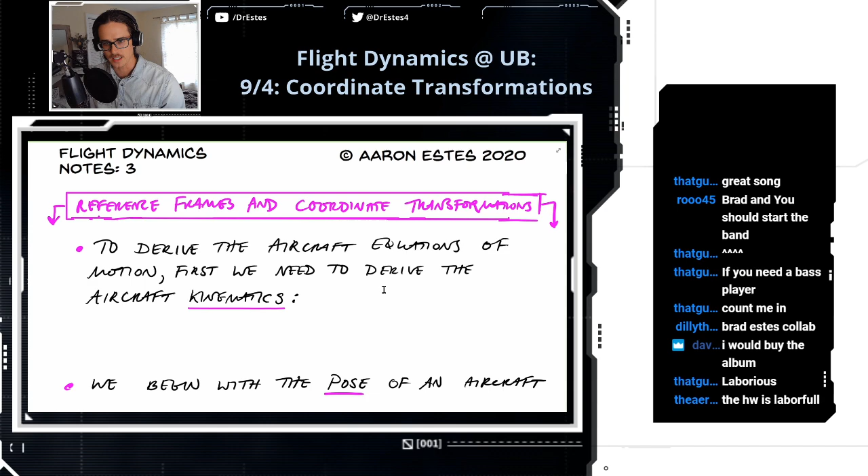Been learning some Led Zeppelin today. Good for you.

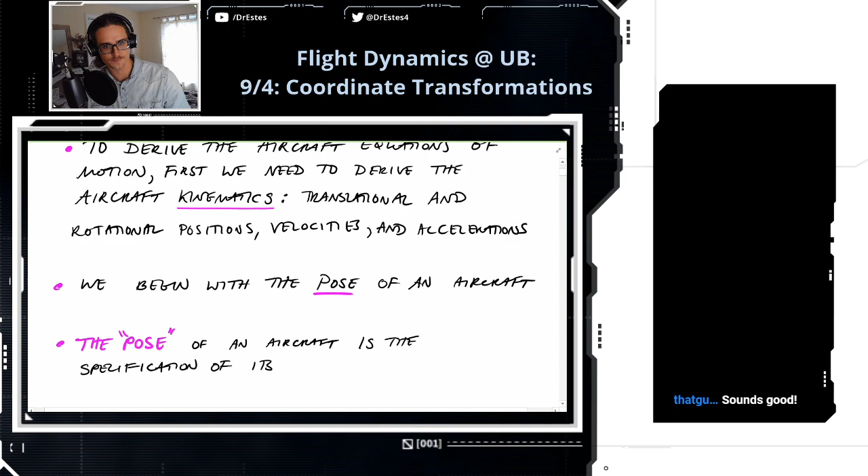And so today we're getting that kicked off, and we're going to begin with the pose of an aircraft. So what is the pose? The pose of an aircraft is the specification of its position, number one, and its orientation. And when we talk about orientation of an aircraft or a spacecraft, this is also commonly referred to as the attitude of the aircraft. So that's its orientation in space, like where it's pointing.

So if we want to specify the pose, we can do that by defining a position vector of the aircraft CG, center of gravity, relative to a fixed frame. Additionally, to get the attitude or orientation, we have to define the relationship between the fixed frame and the body frame of the aircraft using a rotation matrix.

So I have a little diagram down here. We have a fixed frame down here in blue, and then we have the body frame attached to the aircraft. So let's first define a reference frame really quick: it's a perspective from which to make an observation.

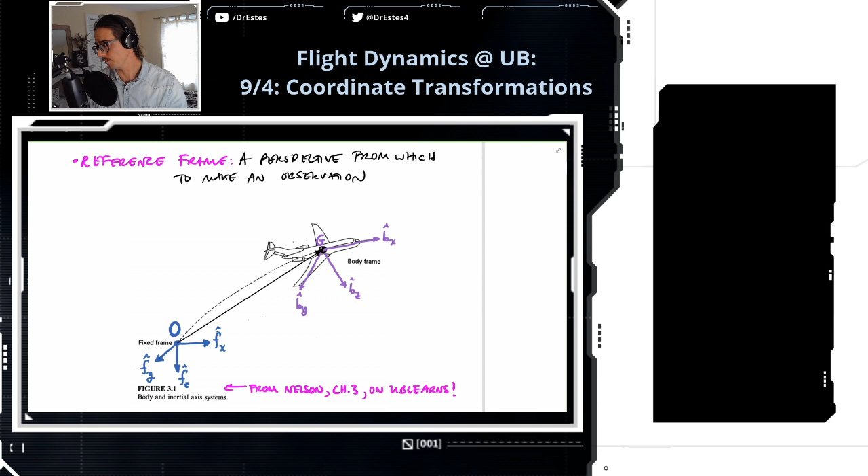We're going to come back to this drawing, but I want to give some notation for each of these frames, the same notation you'd have in intermediate dynamics with Dr. Darrell. When you define a frame, there's a couple pieces: the origin of the frame, so for the fixed frame we have point O, fixed there, and then you describe the 1, 2, and 3 basis vectors.

Just to make that real clear, the origin of the frame is this first piece, and then this is called a triad of unit basis vectors. Unit just means length 1.

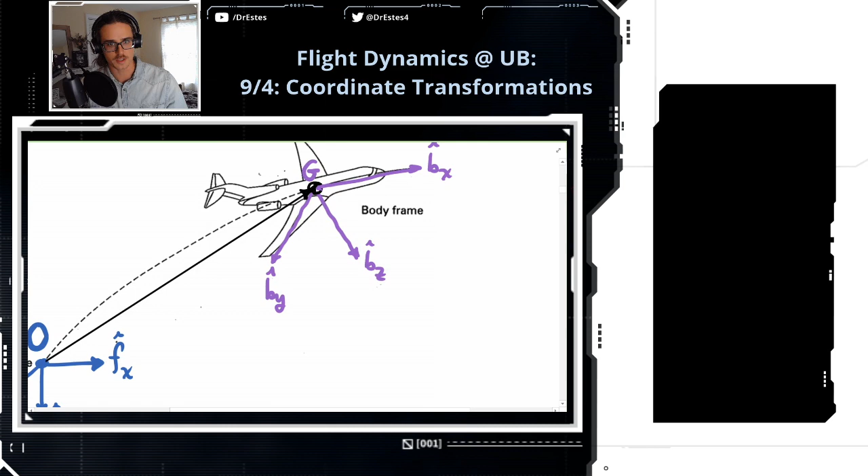So let's define the body frame as well. The body frame for an aircraft is located with the origin at the CG of the aircraft, which I'm calling point G. If you go back up to the figure, you see G sitting right there on the CG. Then our 3 unit basis vectors we're going to call BX, BY, and BZ.

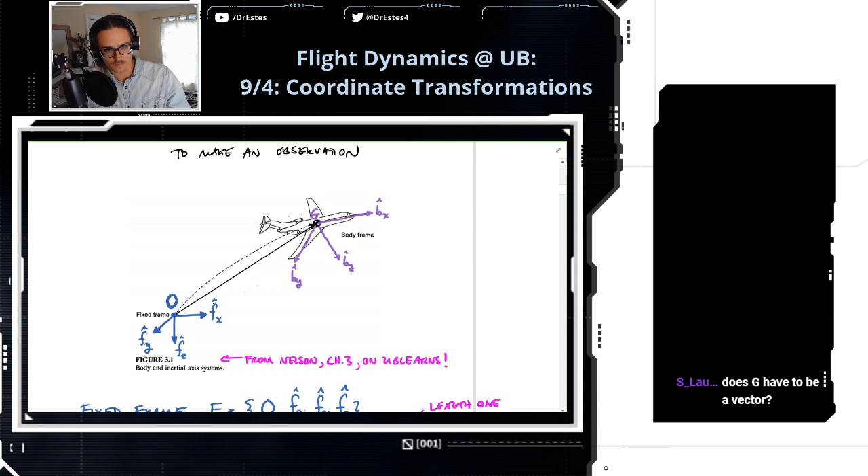Does G have to be a vector? G is not a vector, G is just a point. So G is just specifying the origin of that. I guess you could define the position of the origin relative to another reference frame and then specify the coordinates of that point with a vector. But yeah, it's just the origin of the frame.

For the body frame of an aircraft, the x coordinate goes right from the CG out the nose of the aircraft, and the y vector goes right down the right wing. So if you're the pilot, your right hand is pointing in the direction of y, and the z vector goes straight down, which seems kind of opposite of what you might think. You know, z, we're flying, shouldn't it be pointed up? No, it's pointed straight down on an aircraft.

Same thing with cars: the SAE coordinate system for a car has the z vector going down into the pavement, but x and y are the same. X points out your windshield, y points to the passenger side of the vehicle, if you drive in the United States. I guess it would be the left if you're in the UK.

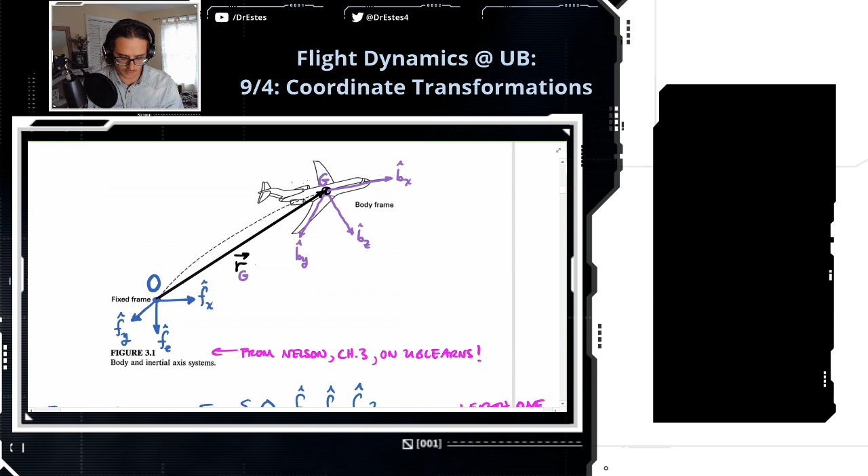Okay, so let's specify a position vector. I kind of already sketched it in here, but we're going to go from this fixed frame origin to the CG of the aircraft. This vector we're going to specify like this, I'll call it R with the arrow on top. I'm retraining myself to draw vectors this way. So this is the position of G, and I'm going to stick consistent with these colors relative to O. So that's the position vector G relative to O, the position vector of the aircraft.

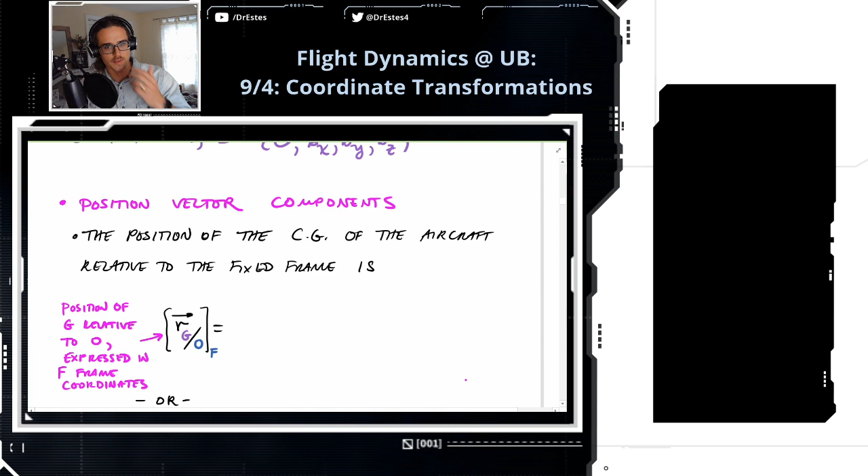So what we're going to do is express this vector first in fixed frame coordinates, in frame F. Position vector components: the position of the CG of the aircraft relative to the fixed frame is this R vector of G relative to O. When I put these brackets and then put the F, that's just showing that I'm going to put this with fixed frame components. So there's going to be an FX component, an FY component, and an FZ component, and I'm just going to call these X, Y, and Z for now, kind of generic.

This way of writing a vector we call basis vector notation. It's where you explicitly write out the basis vectors you're using, so Fx, Fy, Fz, and then these X, Y, and Z, these are what we call the coordinates.

Another equivalent way of writing this vector, which I'm sure you're familiar with, we can organize it in an array. This F down here once again is just telling us that these are components with respect to the F coordinate system. Which notation do you prefer and why?

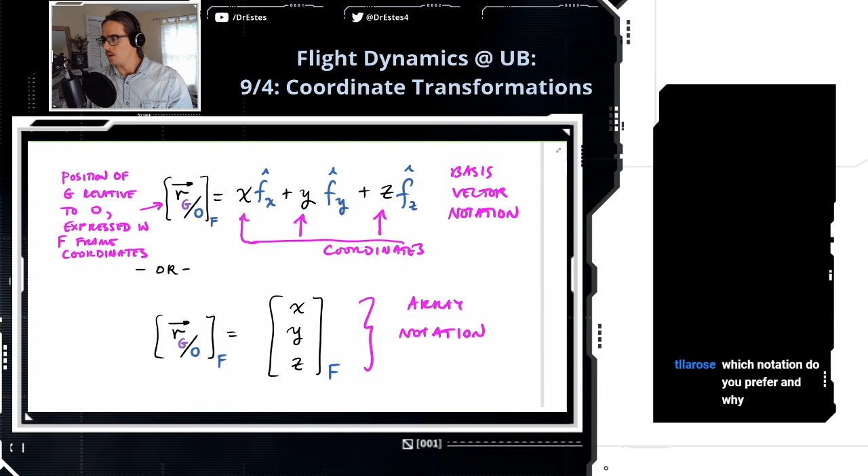Okay, so let's talk about the coordinates of a vector. I just defined them as x, y, z here.

You can recover the coordinates of a vector with respect to a frame by projecting the vector onto the basis vectors of that frame. The way we do these projections is using the dot product operation. So that's how you get components along basis vectors—it's basically casting a shadow from the vector onto that basis vector to see that component.

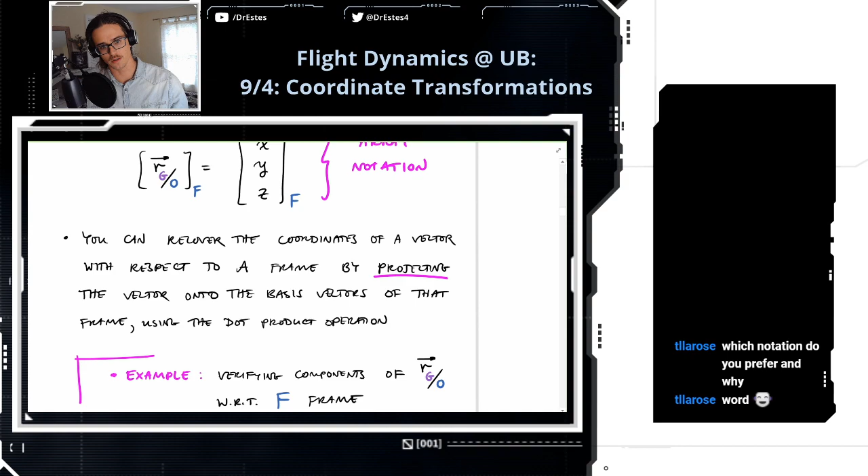So we'll do a quick example to show what this projection looks like for this position vector that we just defined. This example is just verifying the components of this vector with respect to the f-frame.

To project a vector onto a basis vector, you take the dot product. I'm taking the dot product of the position vector with the basis vector fx, and this will give me the projected component along fx. Let's substitute in this vector—these are the components once again.

Trying to stick with these cool colors. The dot product distributes, so I'm going to have fx dotted into fx, fy dotted into fx, and then finally fz dotted into fx.

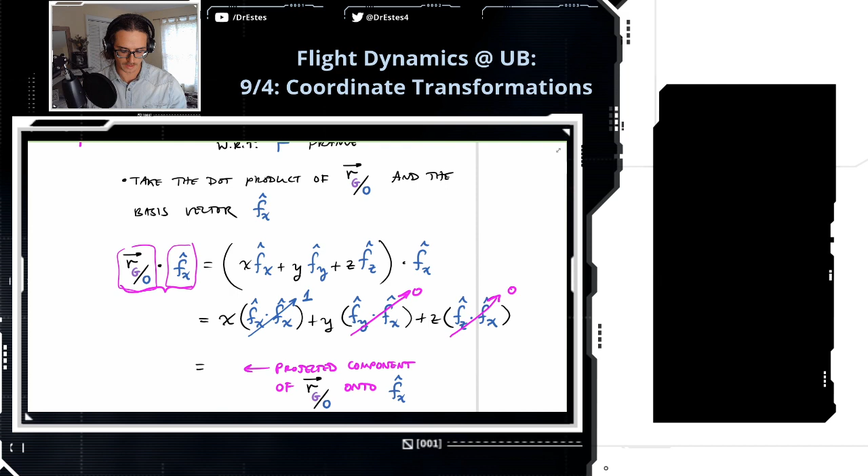If vectors are orthogonal to each other and you take the dot product, meaning they're 90 degrees from one another, the dot product goes to 0. A little on in the notes I show the definition of the dot product with respect to the angle between the vectors—there's a cosine of the angle between the vectors, so cosine of 90 degrees goes to 0. So these orthogonal terms go to 0. The fx dotted into fx term goes to 1 because there's 0 degrees between them—they're the same vector, and since they're unit vectors, that's why it goes to 1.

So the component of this vector along fx is x. This is what we defined it to be, so I'm just showing that this projection operation returns the component that you would expect to see there. If you did the same thing, dotting the vector with fy, it would give you back that component along the y basis vector that we expect. Same thing with z.

So if you want to bring this all together, the position of our aircraft with respect to the fixed frame, with the components expressed in the fixed frame as well, these are going to be the components that we just derived above. So we show that that comes out to x, y, and z.

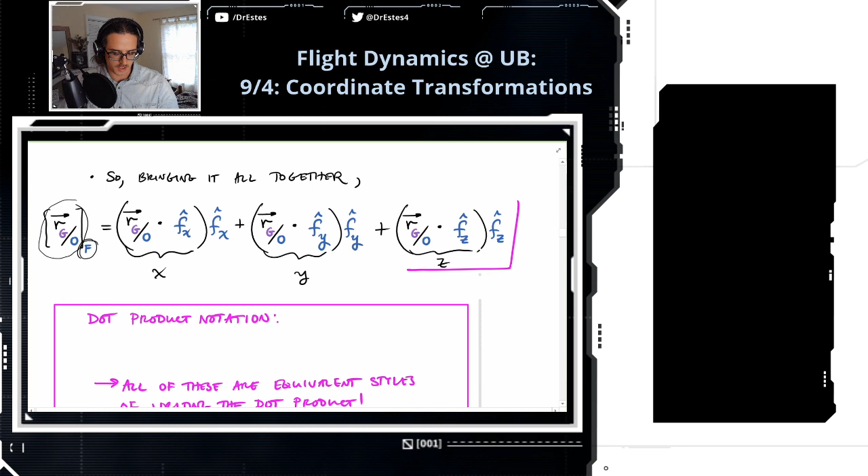And like I said, I want to show you some dot product properties. Let's start with some notation. I've been showing you just a dot for the dot product, but another way you might see this—you've probably seen this—is if you have the transpose of a vector operating on V. This is also called the dot product, and you could also see it this way. Sometimes when it's written this way, it's called the inner product. So these are three ways you might see it.

Now, the dot product doesn't matter the order—like I have U dotted into V, but you could also write it as V dot into U, and you get the same result: v transpose u, or in that other notation. So that's just a good thing to tuck away in the back of your mind—whenever you're dotting two vectors together, it doesn't matter the order.

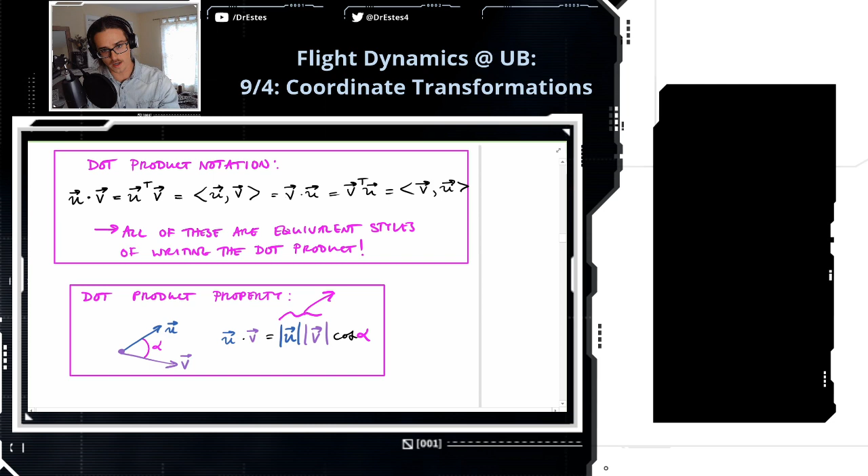I mentioned that the dot product involves the angle between two vectors. So let's take u and v. The definition of the dot product is a scalar result—it just returns a number, not another vector. The number is the magnitude of vector u multiplied with the magnitude of vector v, times the cosine of the angle between them. That's why the dot product of orthogonal vectors goes to 0, because the angle is 90 degrees and cosine of 90 is 0. And if we're taking the dot product of unit vectors, their magnitudes will be 1, so 1 times 1 evaluates to 1 for unit vectors.

That's mostly why we work with unit vectors for coordinate systems—it's just easier. Okay, that's a little dot product notation.

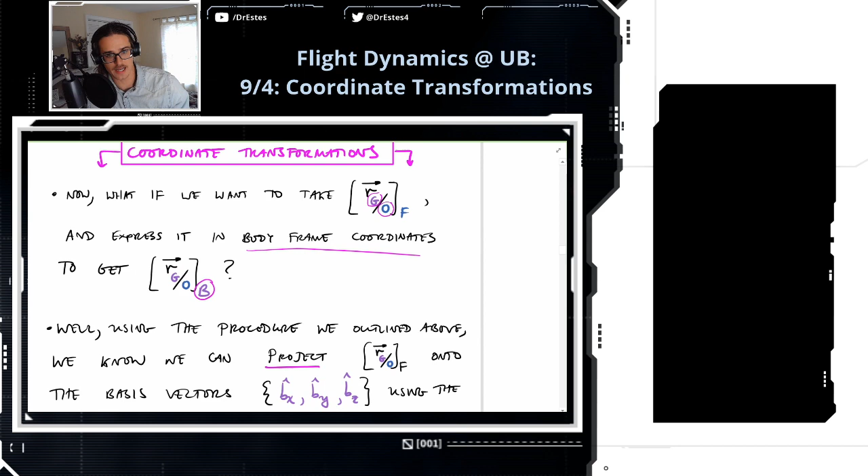Let's talk about coordinate transformations. So we took the position of the aircraft—the center of gravity relative to the fixed frame origin—and wrote it in F coordinates, but what if we want to express it in the body frame coordinates? So I put a sub B here. I want to express this vector with respect to the triad bx, by, bz. How do we do that?

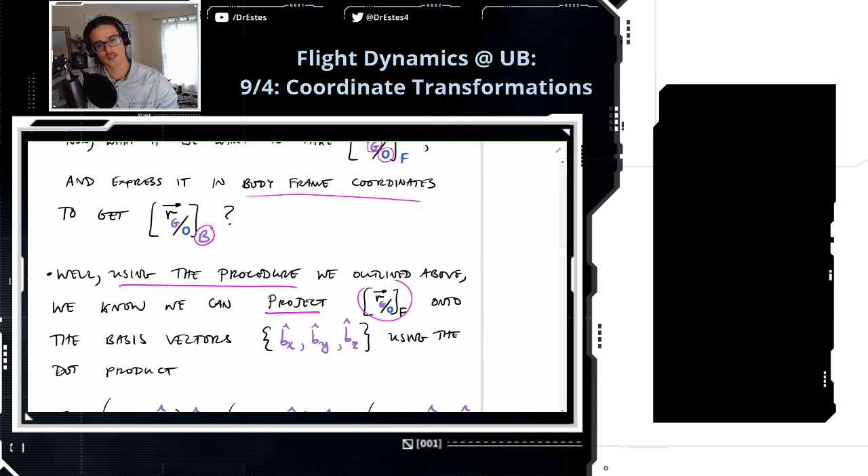Using the procedure above, we know we can project the vector. Let's say I know the vector components with respect to f—they're x, y, z. I can project that vector onto the basis vectors bx, by, bz using this dot product. So this would be the projection onto bx, and this would be the bx component, by component, etc.

But you guys have taken intermediate dynamics, and you know that in practice, the most straightforward way to transform between coordinate systems, we probably won't do this kind of dot product operation. We're going to use a rotation matrix to transform from one set of coordinates to another.

So I'm going to go through a basic way of building this rotation matrix, specifically the direction cosine matrix. On Wednesday, we'll go more into Euler angles, and beyond that, we'll even talk about quaternions a little bit. But we're not there yet.

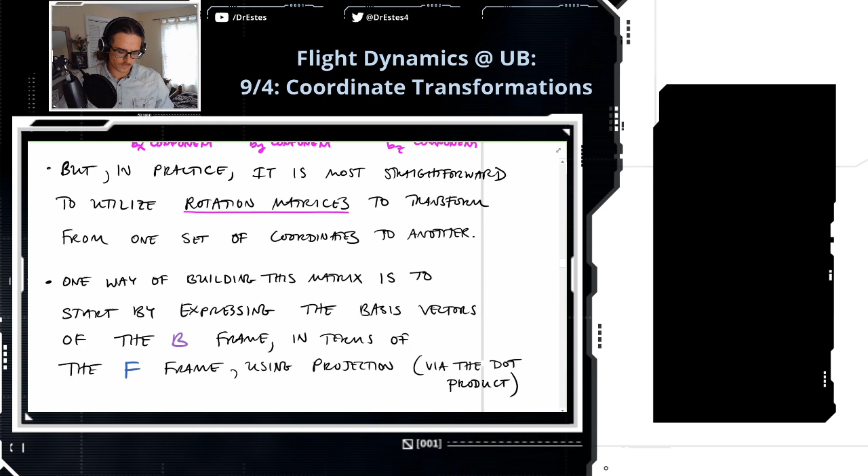So I want to express that position vector relative to the body frame coordinates. We're going to use a rotation matrix, and one way of building this is to start by expressing the basis vectors of the B frame in terms of the F frame. We will use projection to build up to this point.

Let's go through this. So I want to express the basis vector Bx in terms of Fx, Fy, and Fz. I'm going to project Bx onto Fx, and that'll be the coordinate along Fx. And I'm going to do that with these other ones as well—I'm going to project Bx onto Fy and onto Fz.

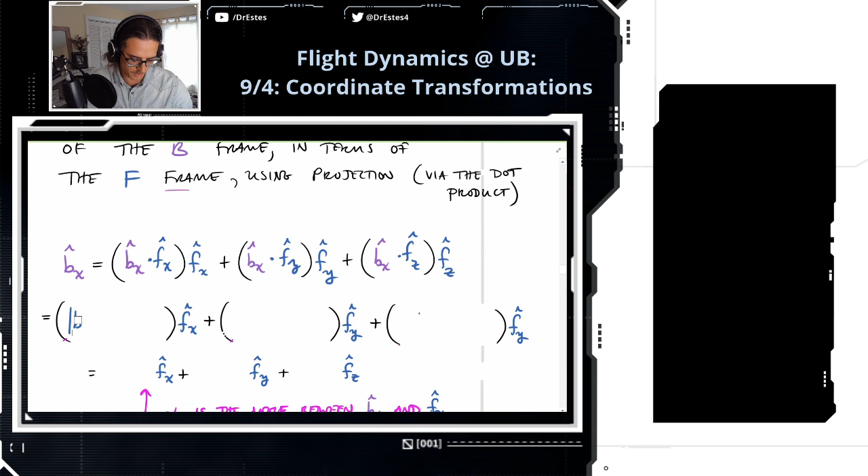All right, let's use the definition of the dot product. Let's be consistent with the colors here. I'm filling this in kind of all over the place because I want to stick with these colors, but I'm just substituting in the definition of the dot product we used up above.

So this first one, bx dot fx, I take the magnitude of them, and then I take the cosine of the angle between them. I'll call alpha 1,1 the angle between bx and fx, alpha 1,2, alpha 1,3. So 1,2 is the angle between bx and fy, 1,3 is the angle between bx and fz. And we know because we defined all of these basis vectors to be unit vectors, these magnitudes are going to evaluate to 1, and we're just left with cosine alpha 1,1, cosine alpha 1,2, cosine alpha 1,3.

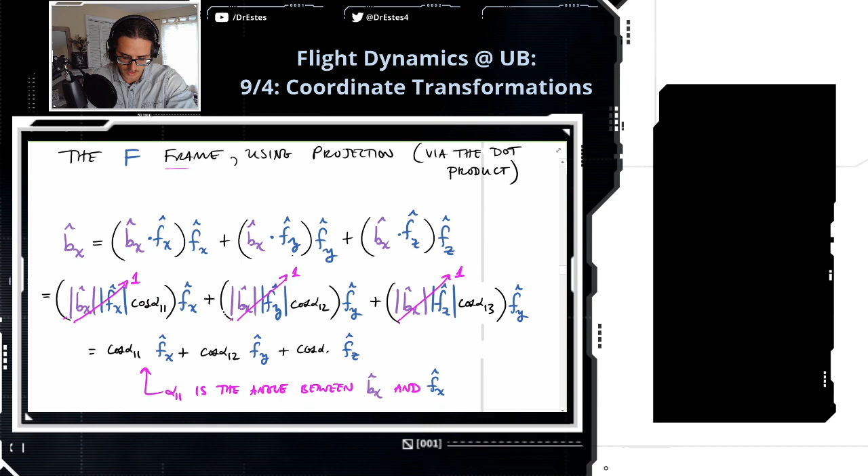And then I just made a little reminder note here: alpha 1,1 is the angle between bx and fx. So this is bx expressed in the f-frame components. It just boils down to the cosine of the angle between each of these vectors.

So if you did the same thing for the other basis vectors like by and bz, let's just fill those in, knowing that we're just going to end up with the cosine of the angles between these as the components here.

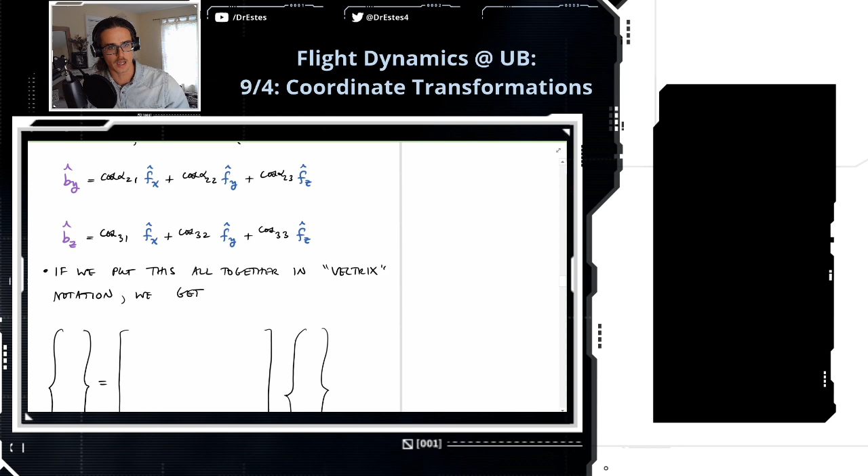Now this next part is where the rotation matrix comes in. Because I can take these three vector equations, bx, by, and bz, and you can organize this in what we call vectrix notation. So it's kind of a bridge between vector and matrix.

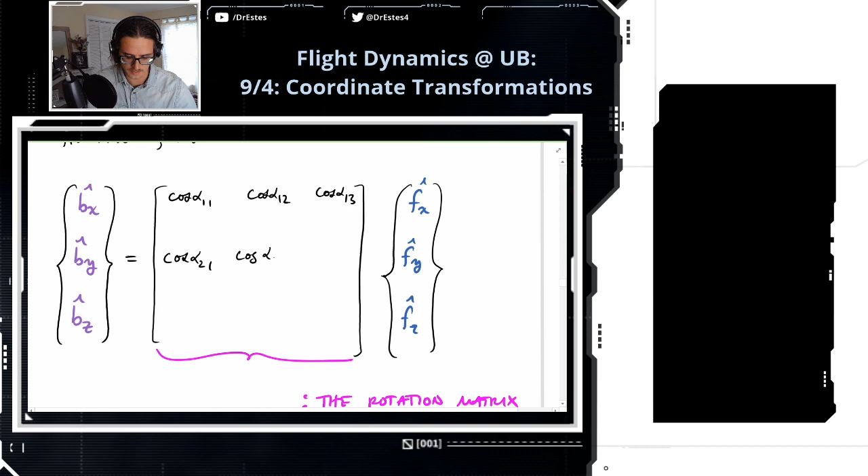So on this side, I'm going to have bx, by, bz, and I know how these are related to fx, fy, and fz. So from our bx equation, I know it's cosine of alpha 1,1 times fx plus cosine alpha 1,2 times fy, cosine alpha 1,3 times fz. And now you can see why I named these like 2,1, 2,2, and so on, because they correspond to the locations within this matrix.

And I think you can also see why they call this a direction cosine matrix, because each entry is a cosine of the angle between two basis vectors.

So once you fill in that matrix, we're going to call this R—I think Dr. Darrell used kind of like a capital T with a scripty thing, but we're going to use R for rotation matrix. And we're going to have these superscripts, so this is going to be the rotation matrix that relates the frame F to the frame B. So here I say that on the right: the rotation matrix from F to B.

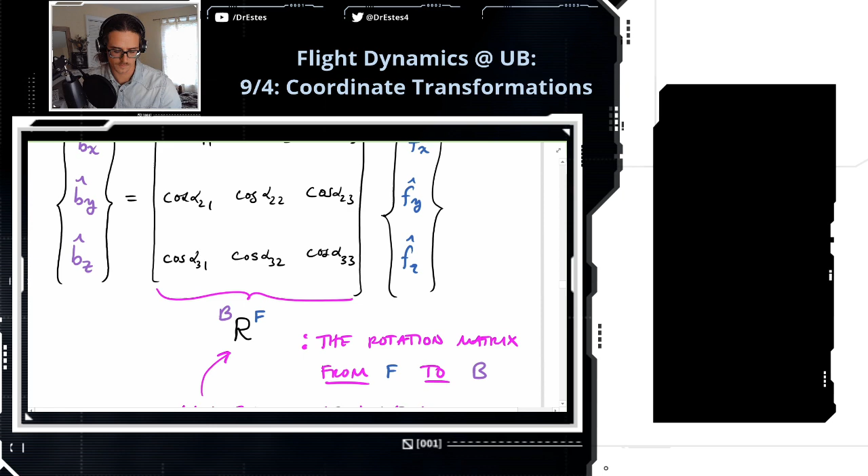Is this coming back to you guys, or are you like, I remember this from intermediate dynamics? So rotation matrix—you can also call it transformation matrix, or like I said, a direction cosine matrix, but they all mean the same thing.

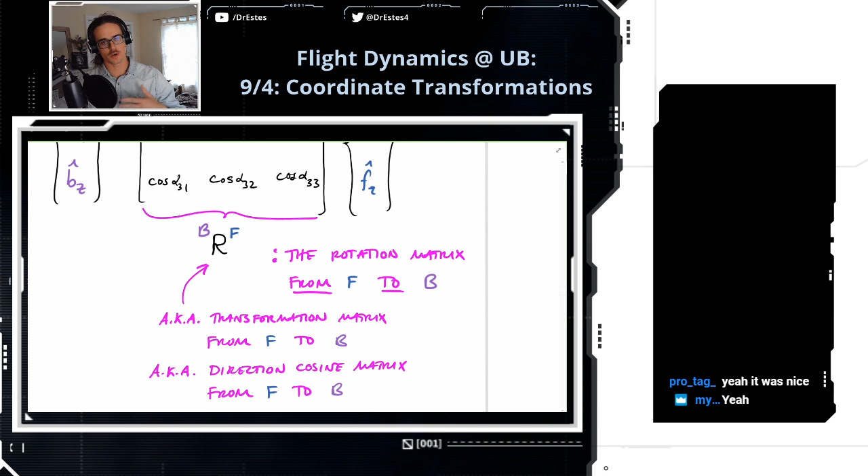All right, so how do you apply this? Well, once you have this matrix, we can use it to transform vectors between F and B coordinate systems as follows. So let's say I want to get this position vector in terms of the basis b, and what I have is the vector with respect to f.

Look at this commitment to the color. That takes a little effort right there. But I'm getting pretty agile about just swapping the colors in and out.

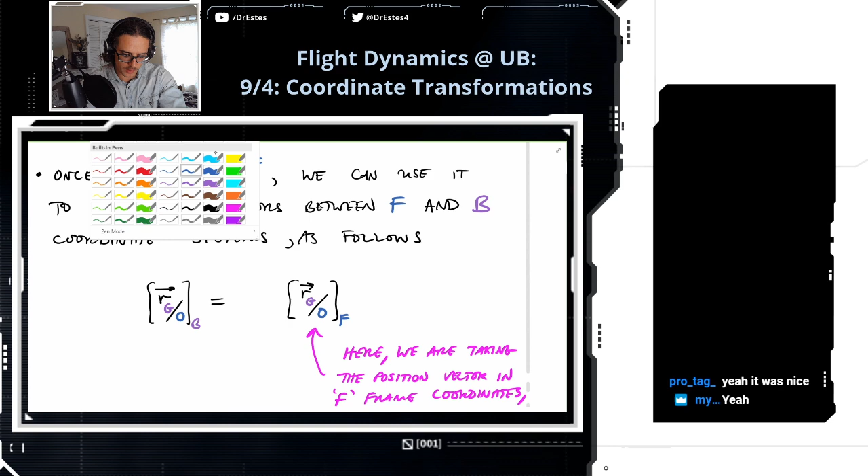Okay, so say I have that vector. I'm going to operate on it using the rotation matrix from F to B. Here we're taking the position vector in the F frame coordinates and transforming it into the B coordinates using that rotation matrix.

Now it's really easy to go back and forth, because once you have this matrix, if you just take the transpose of the matrix, it transforms in the opposite direction. We're going to see that that's a property of rotation matrices.

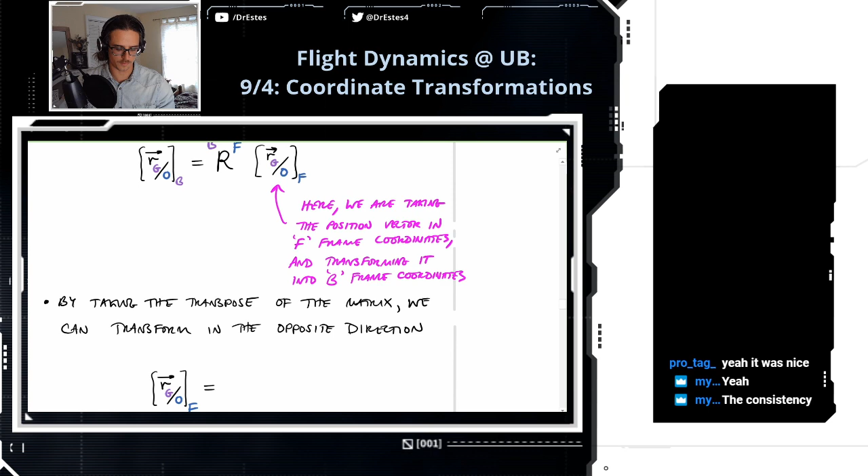Okay, let's do the flip side here. I'm going to cheat, I'm going to copy this from up here. Got it. And then I'm going to copy this.

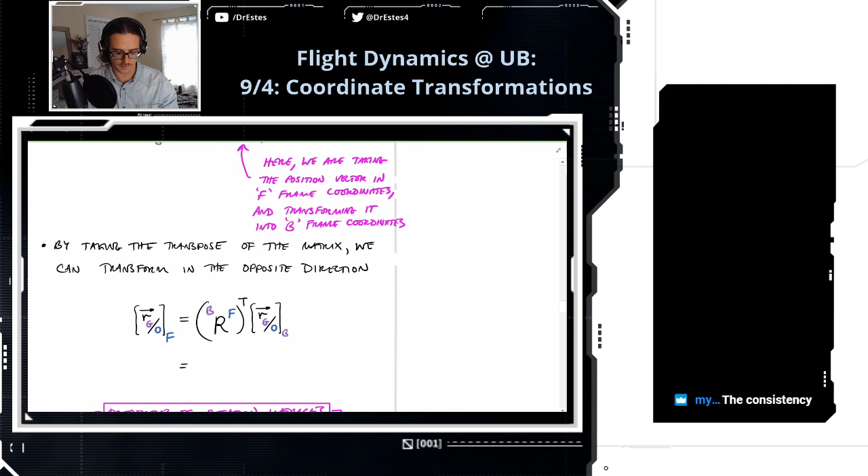So if we start with the vector with respect to the B frame, and we have this rotation matrix that goes from F to B, that's no problem. You don't have to rederive the matrix or anything. You just have to know that if I take the transpose, then this becomes the transformation from B to F.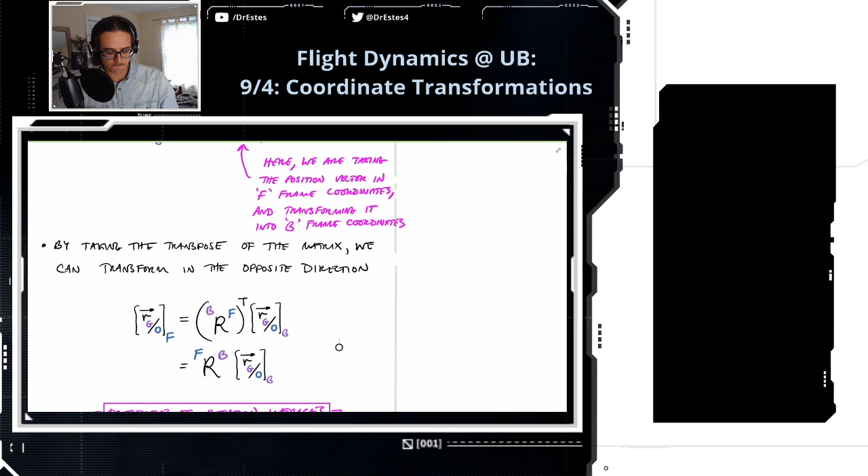Okay. Guys, I think this lecture's not going to go the full amount of time today. I am blasting through this much faster than I expected for some reason. We'll see. But it's Labor Day, you know.

All right, let's talk about some properties of rotation matrices, some that I just mentioned concerning the transpose. If you have a rotation matrix, there are two properties I'm going to give you. This is a way for you to debug a rotation matrix that you might come up with. You have to check that these properties are satisfied to know that it is in fact a rotation matrix.

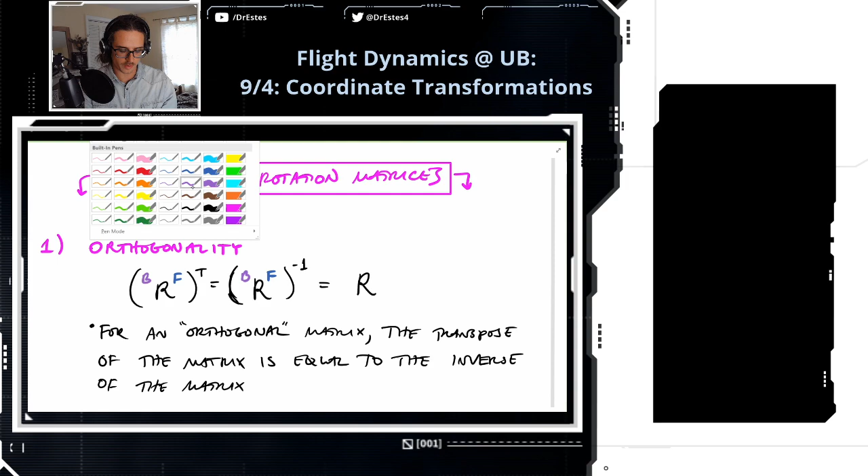So the transpose of an orthogonal matrix—a rotation matrix is an orthogonal matrix, and this is what it means to be orthogonal: your transpose is equal to your inverse. So the transpose of a rotation matrix is equal to its inverse. And as far as transformations between coordinate systems go, when you take the inverse of the rotation matrix from F to B, it becomes the rotation matrix from B to F.

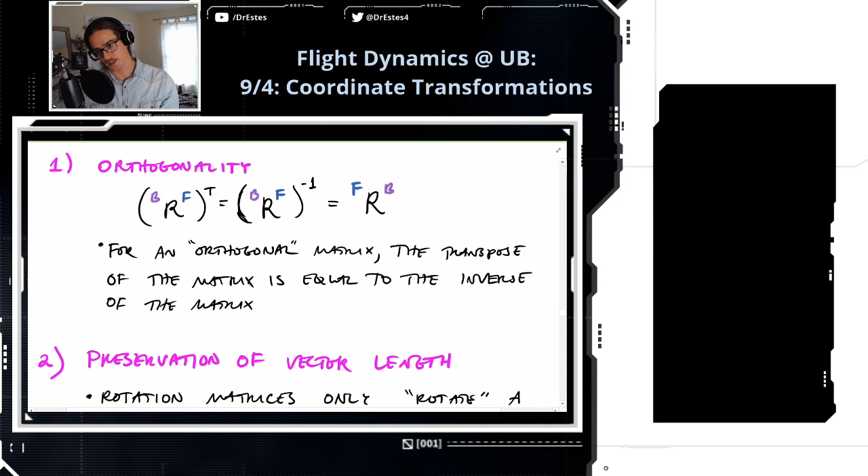All right, the next property: rotation matrices preserve the length of a vector, which makes sense—they're called a rotation matrix, they just rotate a vector that they operate on. They do not scale the vector. So what does this mean mathematically? This means that the determinant of the rotation matrix must be equal to 1.

So that's something really easy to check in MATLAB. If we ask you to derive a rotation matrix, check your answer—take the determinant of that matrix. Oh wait, I need to change this statement here. It could be equal to plus or minus 1. Minus 1 is like a reflection operation.

Okay guys, to bring this full circle, we're going to do an example of a coordinate transformation, and then we'll be done for today. Then you can enjoy the rest of your Labor Day. If you need help with the homework, you can join our office hours at 4:30.

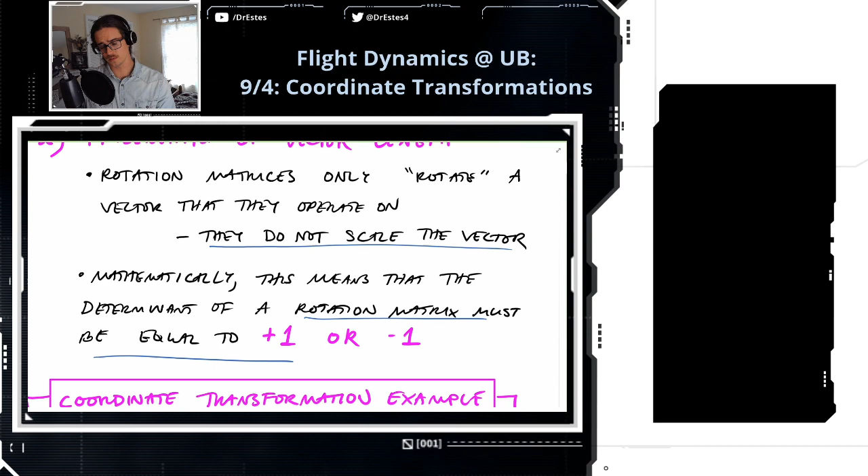You can go for a nice walk outside. You can go for a nice kayak. You can go paddleboarding. Good grief.

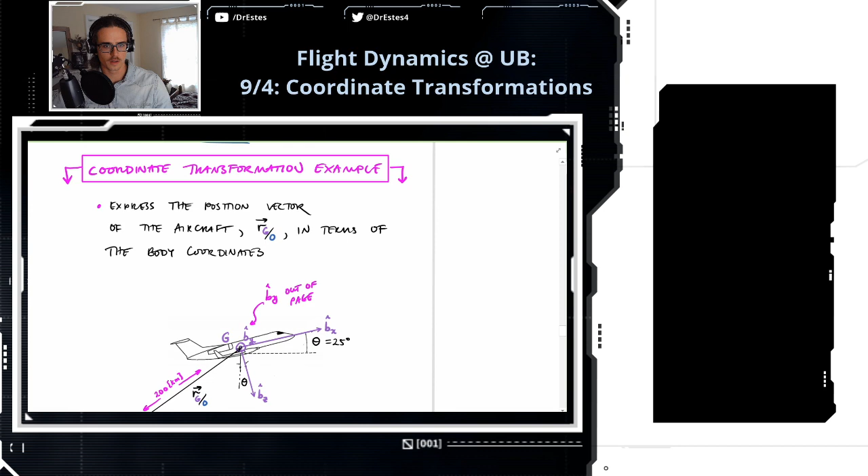Okay, so here's our example. I want you to express the position vector of this aircraft.

Are there office hours tomorrow too, or no? I need to check the syllabus. I know I cover office hours Monday and Thursday, and the TA covers two other days, but I'm not sure if he has office hours on Tuesday.

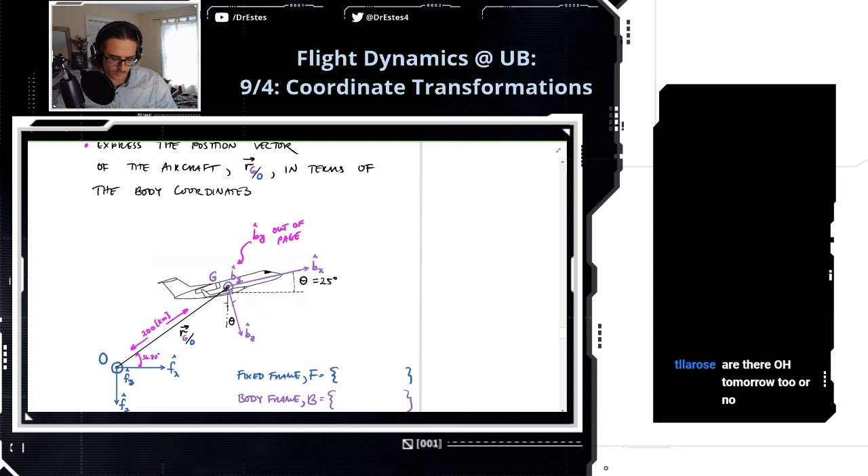Okay, so we have a fixed frame here with origin O, and then we have an aircraft with its body frame.

So I don't think there is any on Tuesday. Okay, office hours Wednesday and Friday. So we don't have office hours on Tuesday.

So the origin of the body frame is at the CG. The X coordinate goes out the nose of the aircraft, the Z coordinate straight down, and BY is coming out of the page towards the right wing of the aircraft. Right now the nose is pitched up 25 degrees relative to horizontal as described by this fx basis vector. The distance between point O and point G is 200 kilometers.

And the angle in here is 36.87 degrees. So we want to get, once again, the goal of the problem is to get the position vector in terms of body coordinates. So first we're going to get the coordinates with respect to the F frame because it's just easier that way—the way this problem is set up, that'll be easier to get.

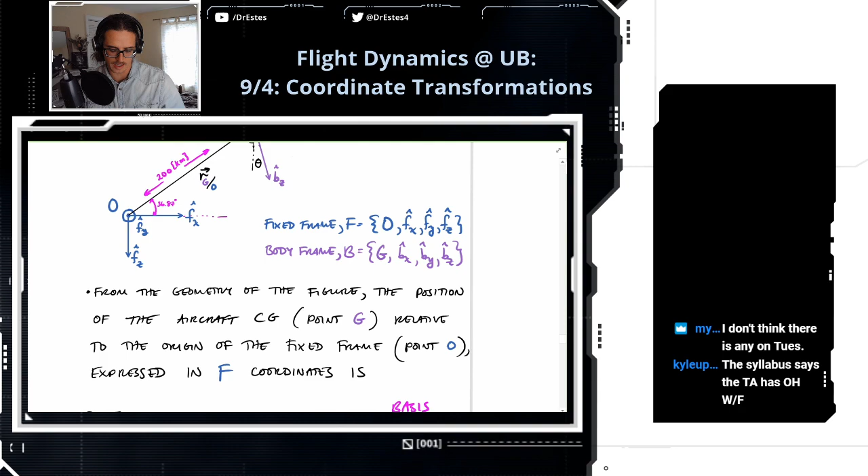Okay, so I'm just writing out what these frames are: BX, BY, BZ. Okay, so from the geometry of the figure, the position of the aircraft CG, point G, relative to the origin of the fixed frame, point O, expressed in F coordinates—so we can see there's an X component.

If you project the position vector down, the length along Fx is 200 kilometers times the cosine of 36.87 degrees. The Fz component is 200 sine 36.87 degrees. However, it's important to recognize that Fz points straight down, whereas this component is facing up, so that's going to be negative relative to Fz.

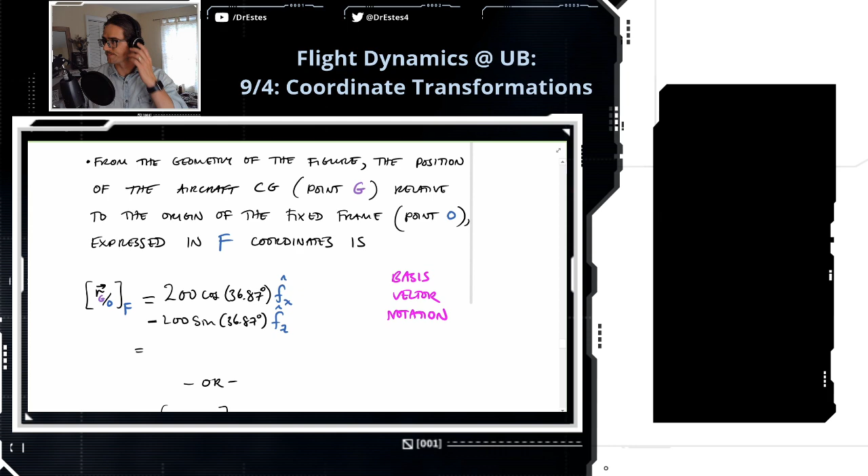So let's fill this in: 200 cosine 36.87 degrees along the Fx direction, plus 200 sine 36.87 degrees—oh sorry, that's minus—along the Fz direction. And if you multiply that out, it comes out to something really clean: 160 fx and minus 120 fz.

So that's basis vector notation. Or if we put it in array notation, the x component comes first, the component along y is 0, and then the component along z is minus 120.

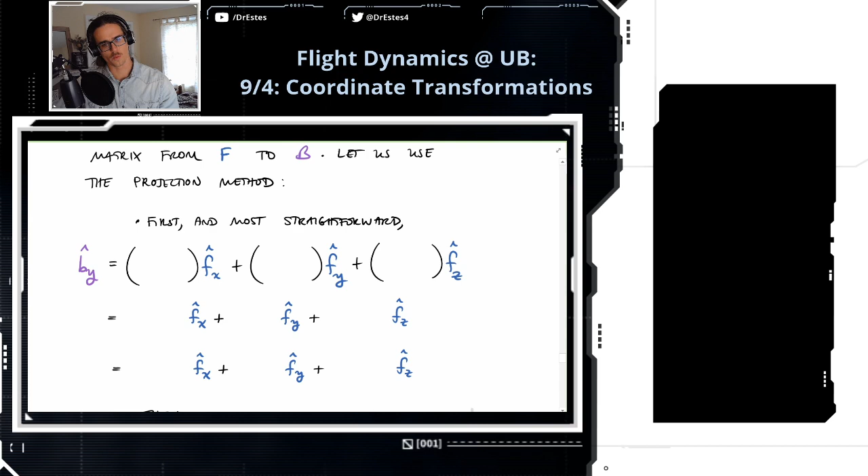Okay, so we have the vector in the F frame. As we mentioned before, our strategy for bringing it to the B frame is to derive a rotation matrix between the F frame and the B frame. We're going to get the transformation matrix, and we're going to go through this in gory detail, just to practice it and drive it home.

Would the problem specify if the y component is not 0, since we can't see that in 2D? Yeah, that's right, that's right.

So I'm projecting by onto the different components of F, and this gives a relationship between these different basis vectors. Because by is coming out of the page, and fx and fz are in the page, there's 90 degrees between by and fx, and also between by and fz. Then by and fy are both pointing in the exact same direction, straight out of the page, so that's cosine 0. We started with this one because it's the easiest: cosine of 90 degrees is 0, cosine of 0 degrees is 1, and cosine of 90 degrees is once again 0. So that's by expressed in fx, fy, fz.

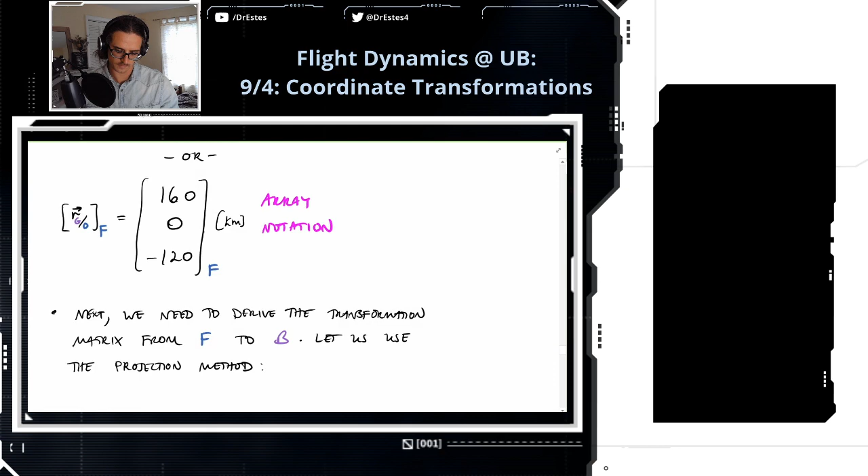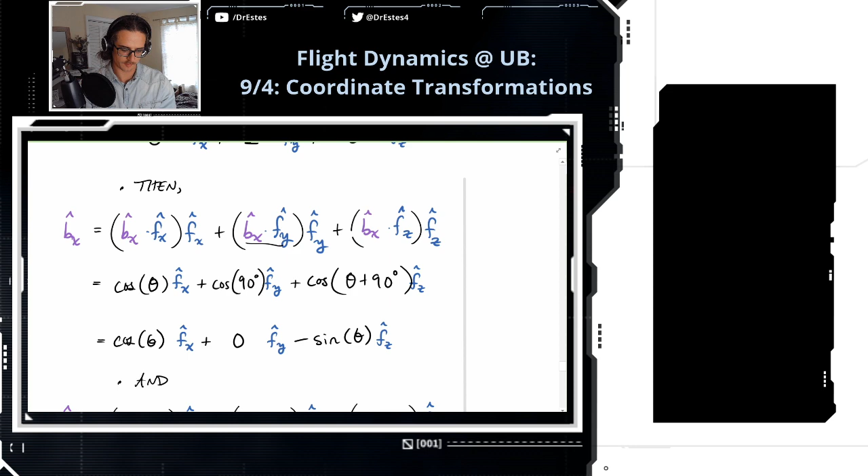Now what about the angle between BX and FZ? Let's go back to the figure. BX is going out the nose of the airplane, FZ is going straight down, so I could draw FZ like this. The angle between BX and FZ is this angle right here, and you can see that's theta plus 90 degrees. So bringing these down: cosine theta, this is going to be 0; cosine theta plus 90, this is the same as minus sine of theta. So we're just transforming between that.

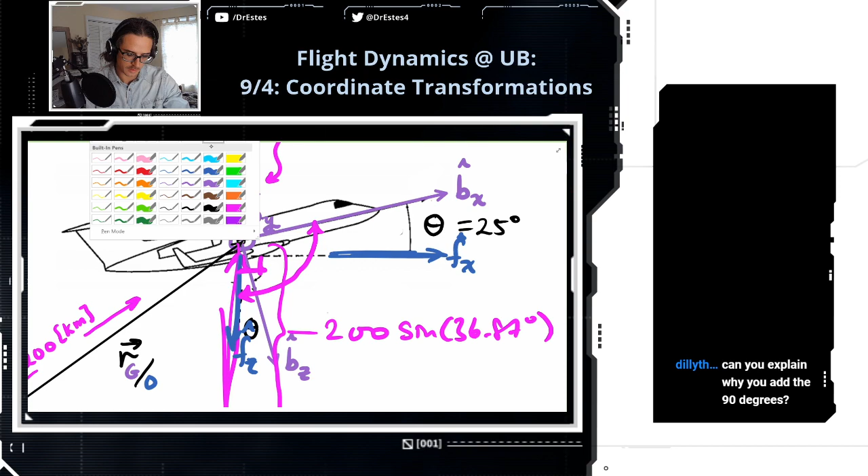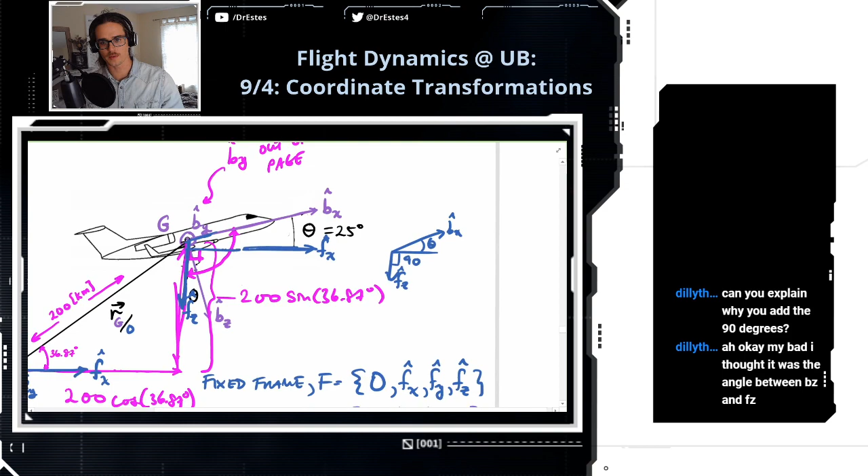Can you explain why you add the 90 degrees? Sure thing. We've got the dot product between BX and FZ. Because these are unit vectors, this dot product boils down to the cosine of the angle between them, so I'm looking for the angle between BX and FZ. BX is going up through the nose, FZ is pointing straight down, so this wide angle between them is theta plus 90—you can see this angle is more than 90 degrees. It's kind of like this: BX, FZ, this is theta, this is 90, so I just add those two together. Oh okay, my bad, I thought it was the angle between BZ and FZ. Okay cool, well that's coming. All right, we're almost done, guys.

So now let's look at BZ. We're projecting onto the basis vectors. Anytime we have BZ related to FY, that's going to be 90 degrees, so I'll just put 0 already.

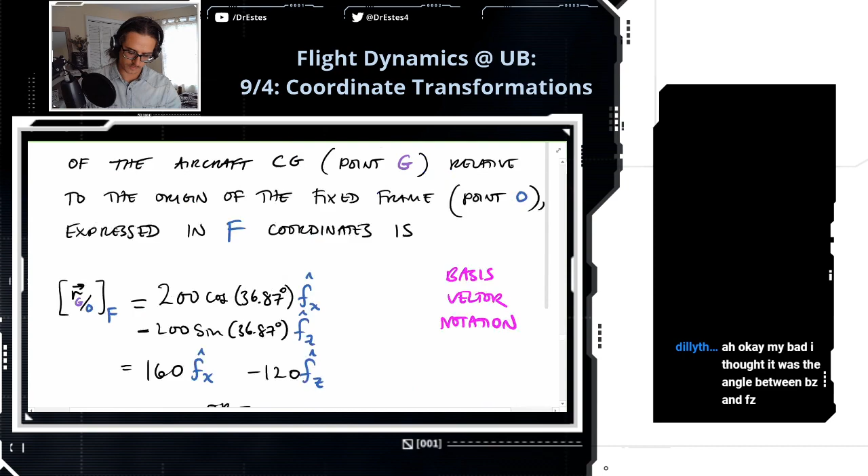Okay, let's look between BZ and FX. BZ is going down this way. BZ and FX, so that's going to be 90 minus theta.

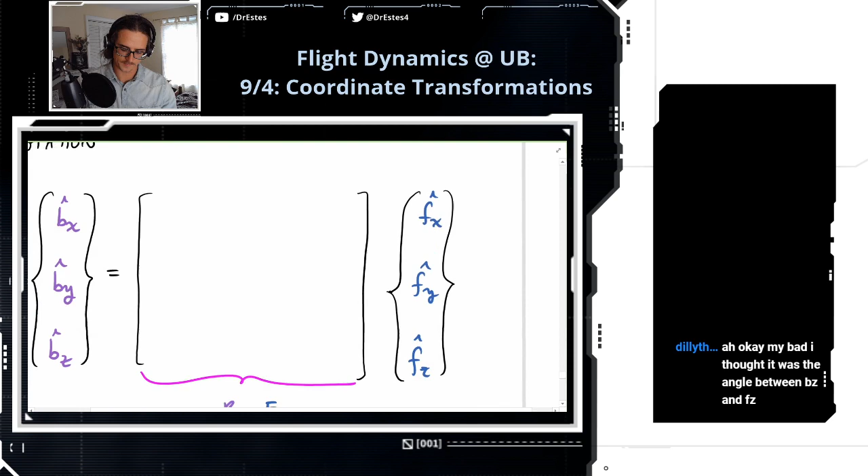And then the angle between BZ and FZ, that's just theta. So 90 degrees, cosine of 90 degrees minus theta just evaluates to sine of theta, and then we'll bring down this cosine theta.

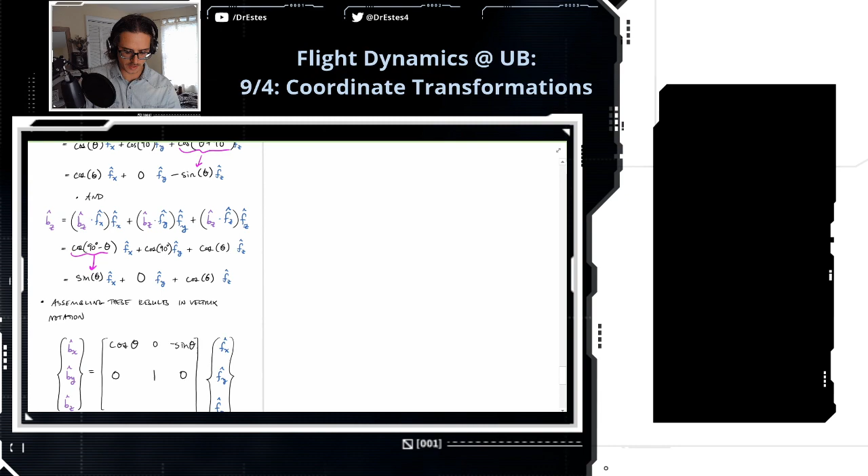All right, so we have three basis vectors related to each other. Let's fill this in matrix form. This is going to be cosine theta, 0, minus sine theta. BY was the easy one: 0, 1, 0. So this is once again called vectrix notation, like a matrix of vectors. And this is the rotation matrix from F to B. That's one way to remember it.

It's a direction cosine matrix — this is a standard form you've seen. We call this a simple rotation; it's a rotation in a plane. That's when you get situations like 0, 1, 0, 0, 1, 0. When we derive a rotation matrix from Euler rotations, it's going to be a succession of these simple rotations in the plane, which is why I had this example.

Uncle Bill. Yellow, y'all. Welcome, Uncle Bill.

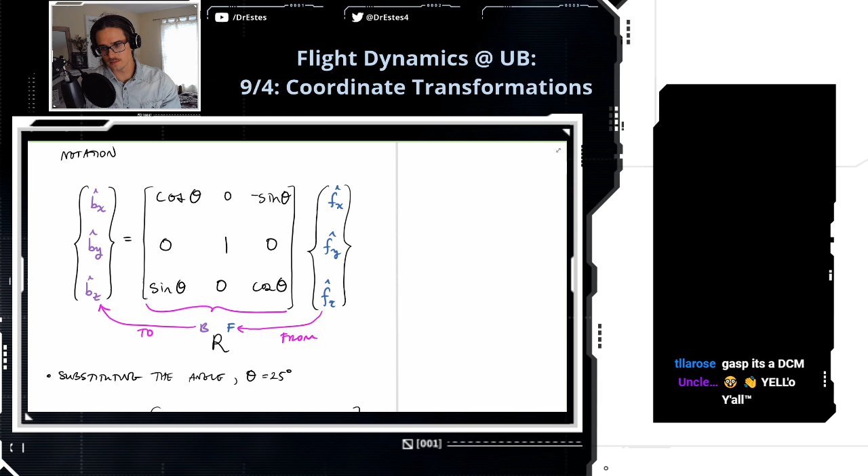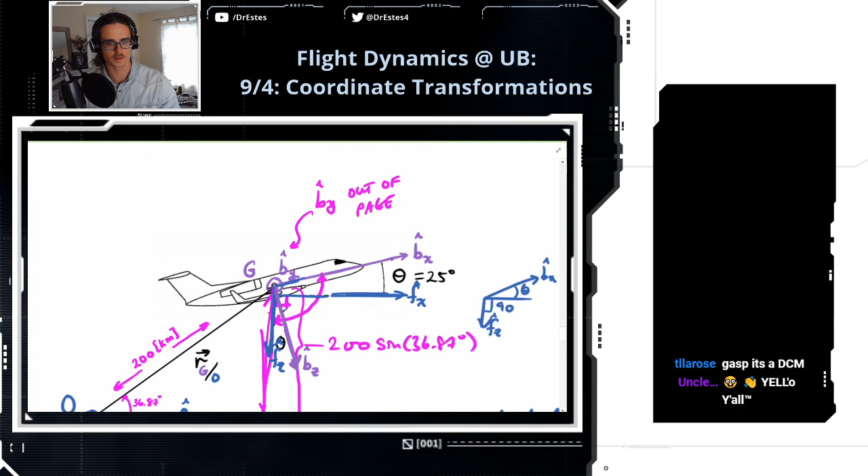All right, so if you substitute in our theta equals 25 degrees. Wait, was it 25 degrees? Hold on a second here. Oh, okay, it is. I thought it was 20 for a second. My bad, okay, let's get some numbers in here.

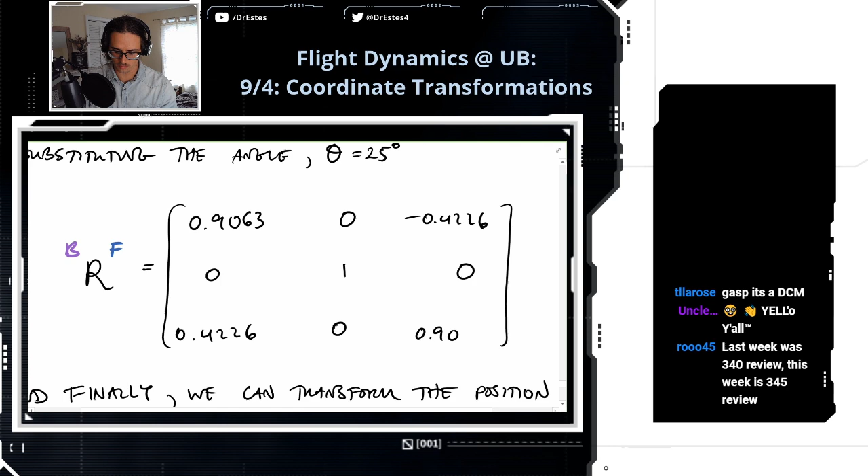0.9063, 0, minus 0.4226, 0, 1, 0, 0.4226... Last week was 340 review, this week is 345 review — hey, we are getting back in gear after summer. Everybody needs a review.

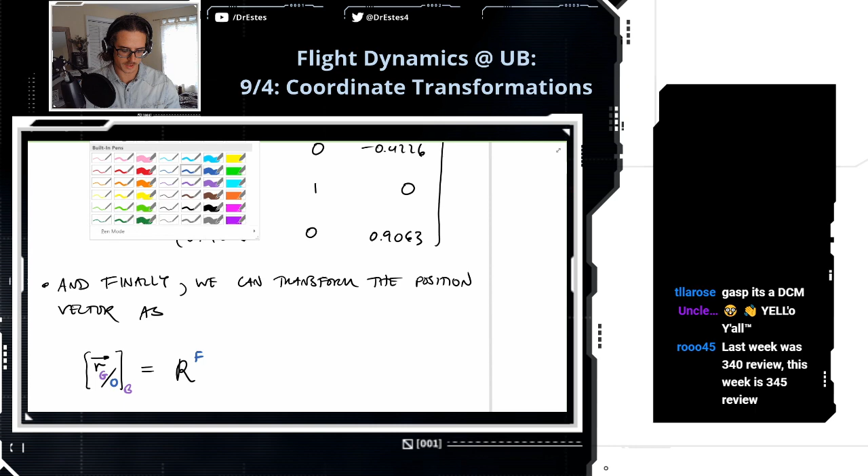Okay, this is our rotation matrix, and now that we have it, we're ready to transform, my friends. We're going to use this, going from F to B, for the vector G relative to O.

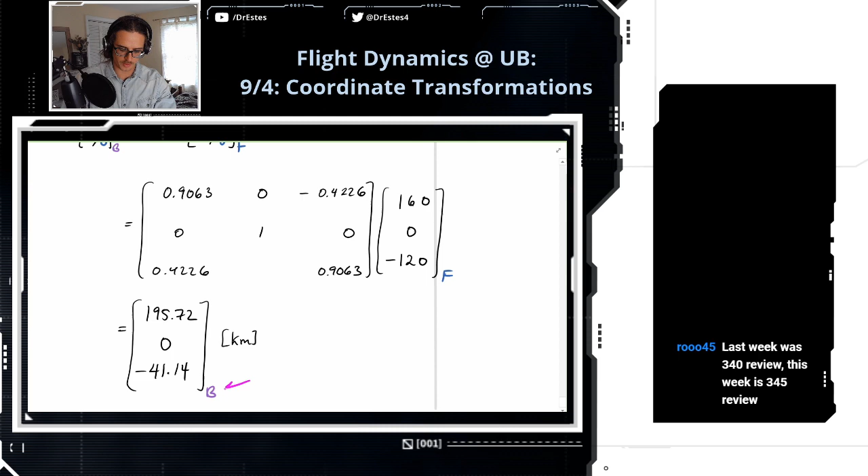So we're going to multiply these out. To remember, the position vector in the F coordinates was 160, 0, minus 120. If you multiply that out: 195.72, 0, minus 41.14. Notice the subscript down here — that's with respect to the body frame coordinates. So this is once again array notation.

And we have finished the example. We just blasted through today. Main takeaways.

Finding the relationship of a vector with respect to another coordinate frame is an issue of projection, and the way we mathematically project things is with a dot product. If you do all of these projections onto the three basis vectors of a given frame, you'll have enough equations to assemble a rotation matrix.

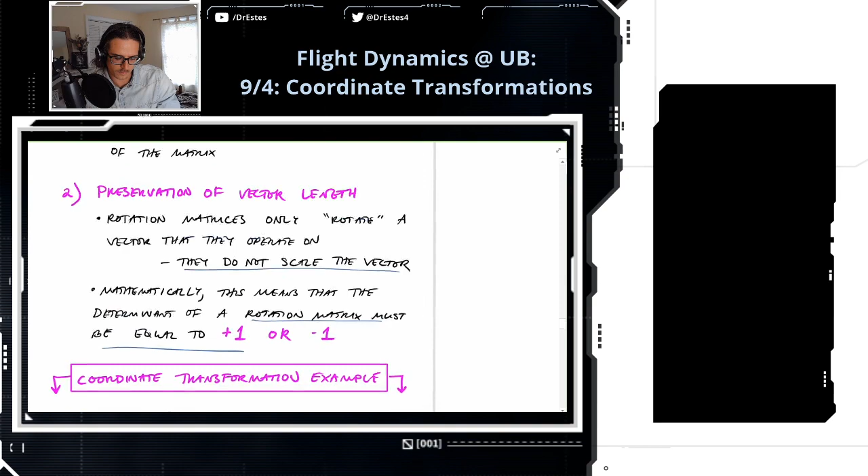And you can see why it's called a direction cosine matrix, because it deals with the cosines of the angles between each of the basis vectors. Now, this parameterization takes 9 different parameters.

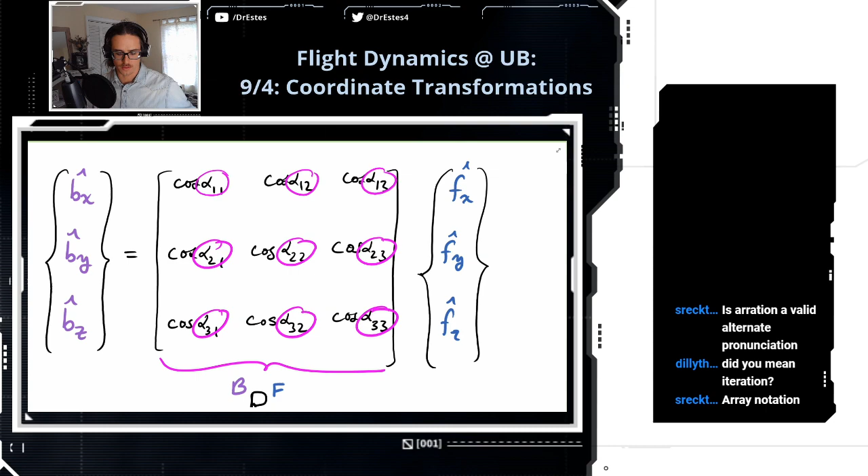Is arration a valid alternate pronunciation? I haven't heard that. Alternate pronunciation for rotation? I don't know. So this takes 9 different parameters to specify the matrix; when you use Euler angles, it only takes 3. Did I say something weird? Did I mean iteration, or did Srechtenwald mean iteration? Array notation. Okay, array notation — arration, is that what I said? I don't know. Is that what I wrote? Okay.

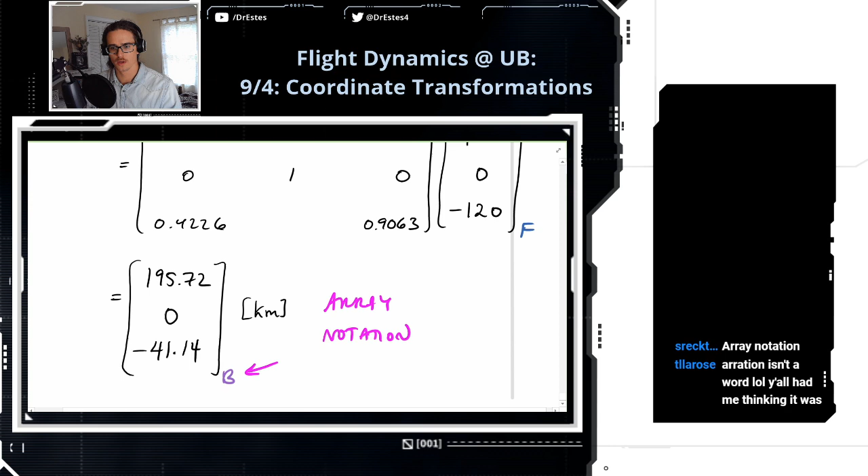Turn up the tunes a little bit. Oops.

I was having trouble with the transfer function on the homework. What was giving you trouble? Could you reword the second half of the problem? The second half of problem 2, part D. Oh, what is that? Let me look at it — problem 2, part D. Let me pull it up.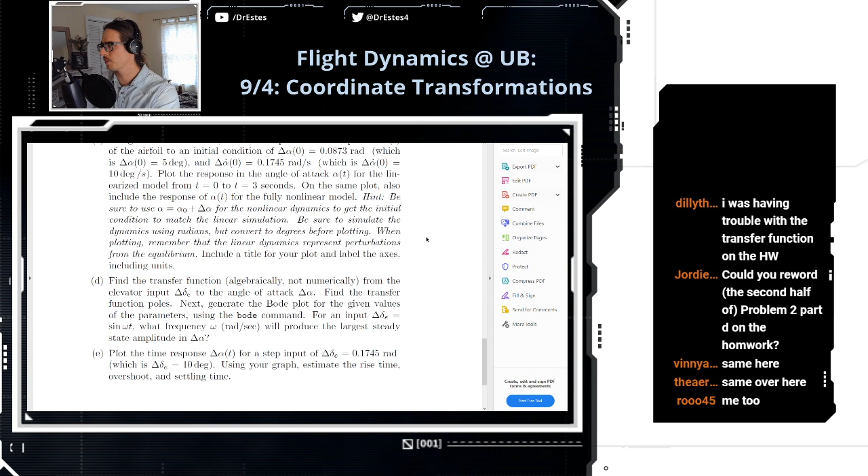This problem 2, part D? Wait, what's wrong with this one?

Okay, so find the transfer function from the elevator input to the angle of attack. A transfer function is the Laplace transform of the output relative to the Laplace transform of the input. So the input is the elevator angle, and the output is the angle of attack. You're going to get that transfer function from this linear perturbation equation. So if you want to get the transfer function, the first step is to take the Laplace transform of this.

Don't let all these deltas fool you either.

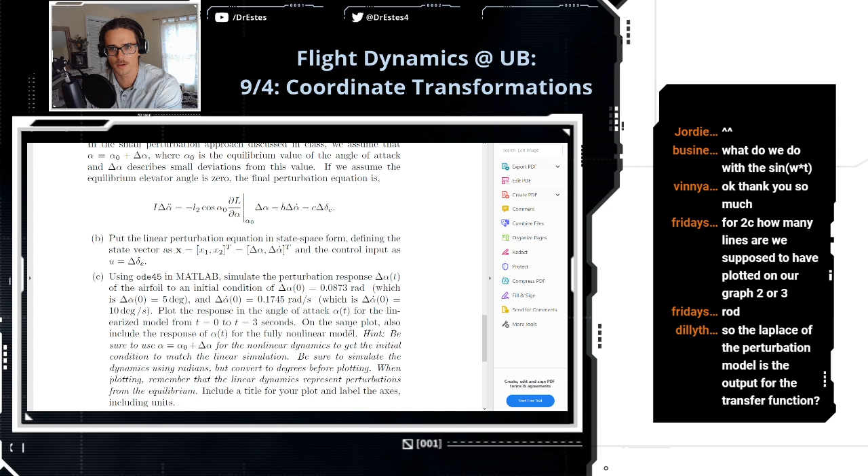So the Laplace transform of the perturbation model is the output for the transfer function.

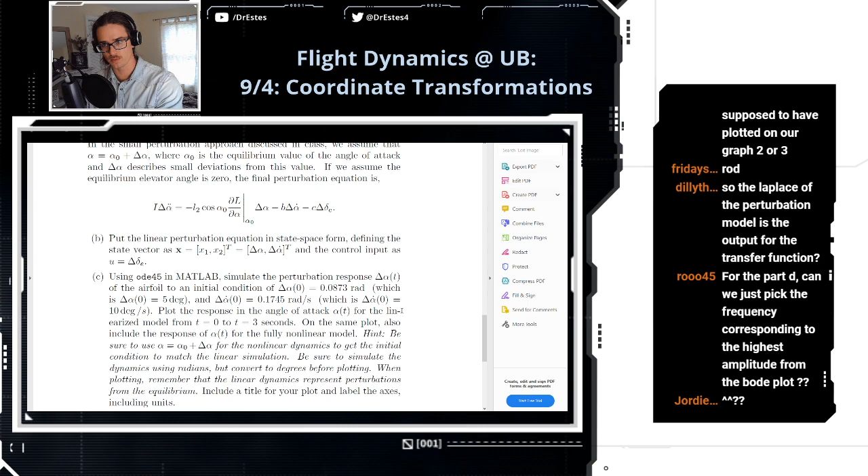Hold on, so for part D, can we just pick the frequency corresponding to the highest amplitude from the Bode plot? Well, what does that mean? I'm going to guide you. And what is it asking for? For an input elevator angle that's sinusoidal, what frequency will produce the largest steady state amplitude?

Do you know what the Bode plot physically means? Do you know what the Bode plot physically means? No! Okay, let me tell you what a Bode plot physically means. So, no, I have a small brain. It has nothing to do with that.

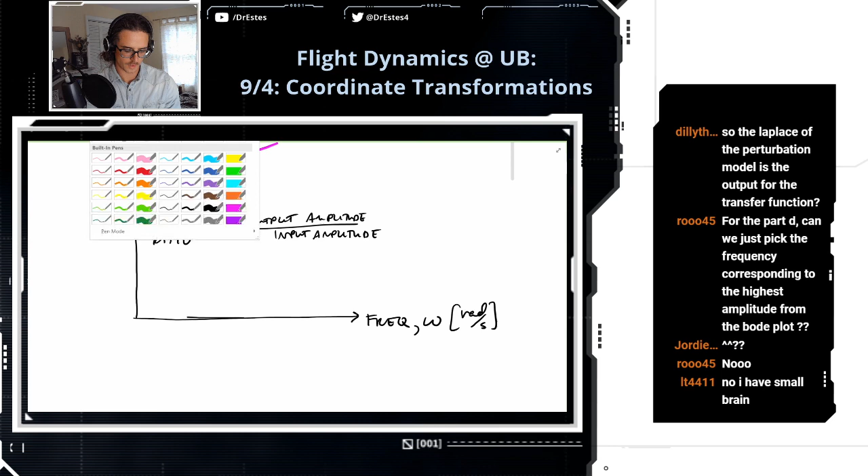So a Bode plot has frequency, or omega, typically in radians per second on the horizontal axis. The vertical axis, in simple terms, is the amplitude ratio. What does that mean? The amplitude ratio is output amplitude divided by input amplitude. Now when we plot it in decibels, you might end up with something like this for a second order system. And at a given frequency, let's call this omega naught, this is the input frequency.

So it means if I take my system and I provide a sinusoidal input at this frequency, feedback, this deserves a few minutes lecture time in future years. Okay, yeah, I guess we're reviewing a lot of stuff, so we could review this as well.

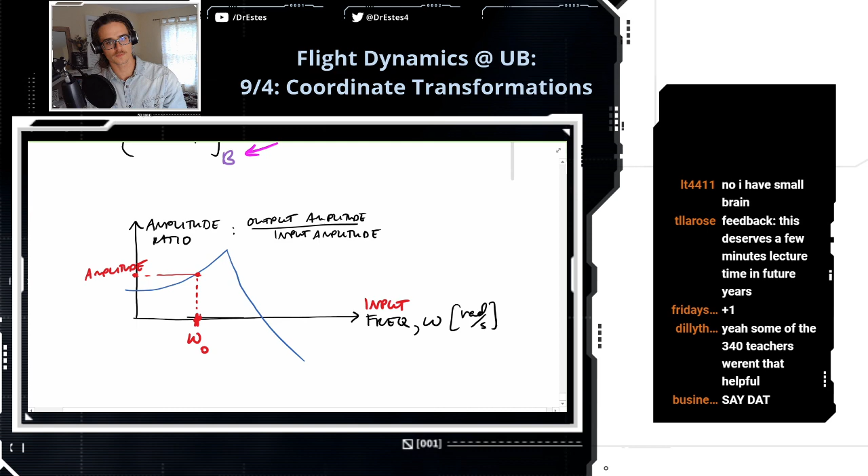So at this frequency, I come over here and I can see this is the amplitude ratio at that frequency. So all this means, let's say that I come over here and at this frequency, the amplitude ratio, what if it's like 5 or something?

Earlier you said that for the transfer function we'd have to solve for delta over alpha. But since we want output over input, shouldn't we solve for alpha? Okay, you're exactly right, Kyle. I misspoke if I said that it was delta over alpha. It's definitely alpha over delta.

So let's say the amplitude ratio is 5. That means that if I give an input of, let's say u of t is 2 sine omega naught t, so it's a sinusoid at that frequency with an amplitude of 2, this means that the output is going to have 5 times whatever the input was. There's going to be some phase shift, but this homework you're not really worrying about that. But that's what the amplitude ratio means. It's how much the amplitude of your output gets scaled.

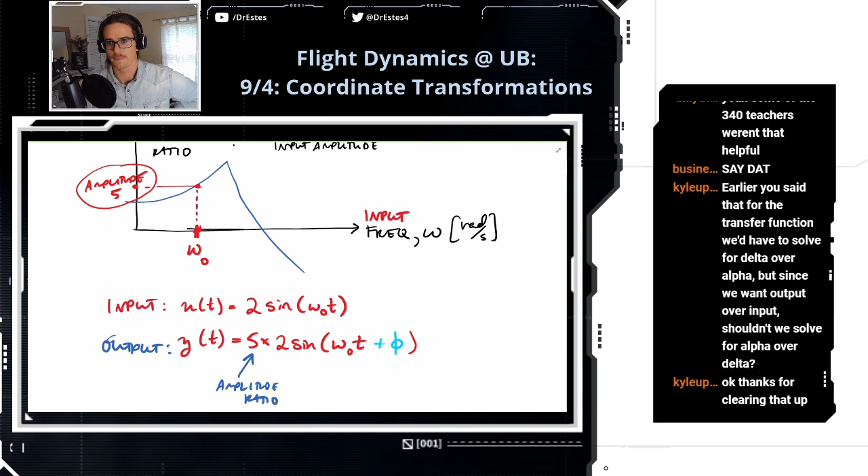Scroll back. What's the y-axis again? It's the amplitude ratio. Oh shoot.

Amplitude ratio is the ratio of output amplitude to input amplitude.

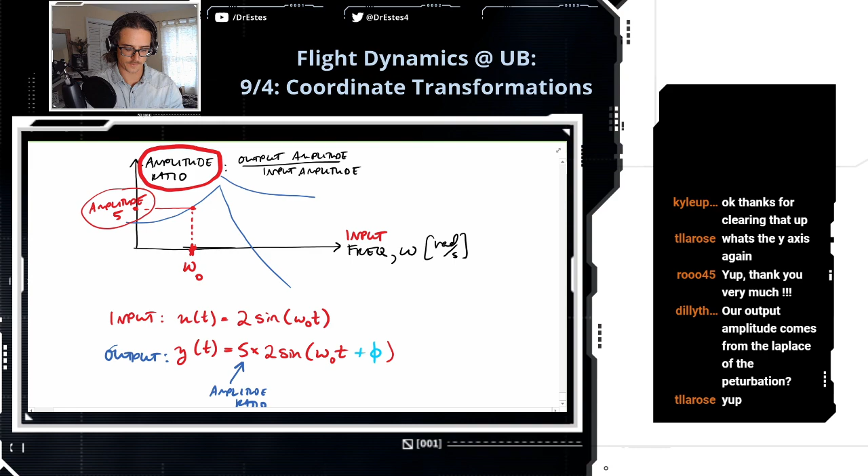Our output amplitude comes from the Laplace of the perturbation. I'm trying to give you a physical interpretation of the Bode plot first, so you understand what it means. But where this amplitude ratio comes from mathematically, it's related to the Laplace transform, because it's equal to your transfer function, let's call it g of s. It's a function of s when you take the Laplace transform of your transfer function. You evaluate that transfer function at s equals i omega, and then take the magnitude of that. That is what the amplitude ratio is.

So it turns out, if you have a transfer function in terms of s, if you substitute in i times omega for s, and then take the magnitude of that, that gives you the amplitude ratio as a function of omega. That's what MATLAB is doing when it runs the Bode command. You give it a transfer function, it evaluates it at i omega, takes the magnitude, and it returns the Bode plot.

Specifically, it plots it in decibels. So when it plots it, it does 20 log base 10 of your amplitude ratio. That's what decibels means.

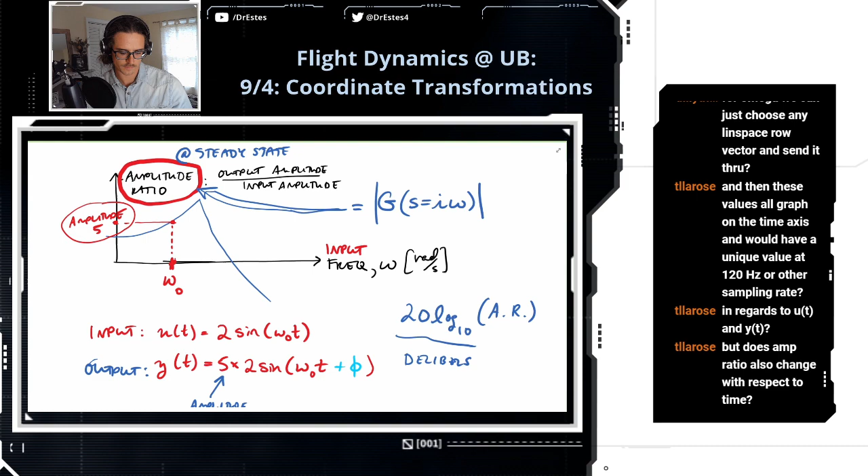This Bode plot, these amplitude ratios of input to output, this is at steady state. Now what that means is... steady state, do you know what steady state means? Like if I have, which of these with respect to time and which aren't would be my question.

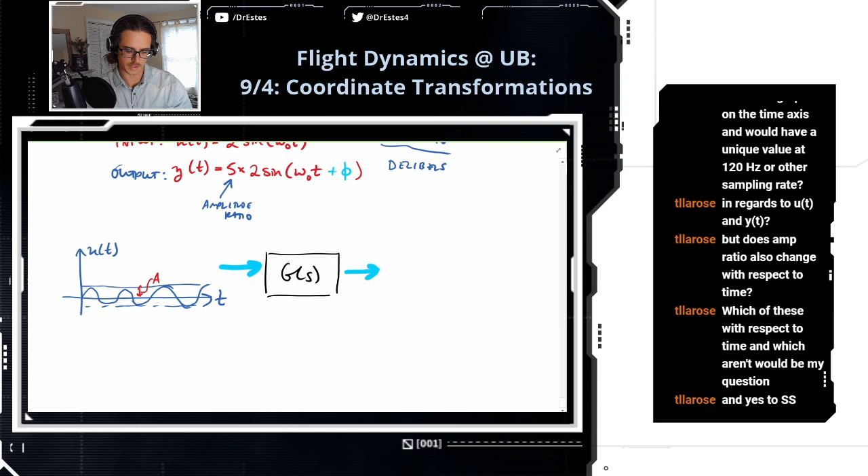A Bode plot isn't with respect to time. Like if I provide an input, let's just say it's a sinusoid with some amplitude. If I provide that as the input to a transfer function g of s, what's going to come out is my output, y of t, over time.

When I first start applying this input, I might have some transient response. Maybe the amplitude is changing, but after a certain amount of time, once we reach steady state, the amplitude will reach a steady state value and it won't change anymore. It'll stay within these bounds.

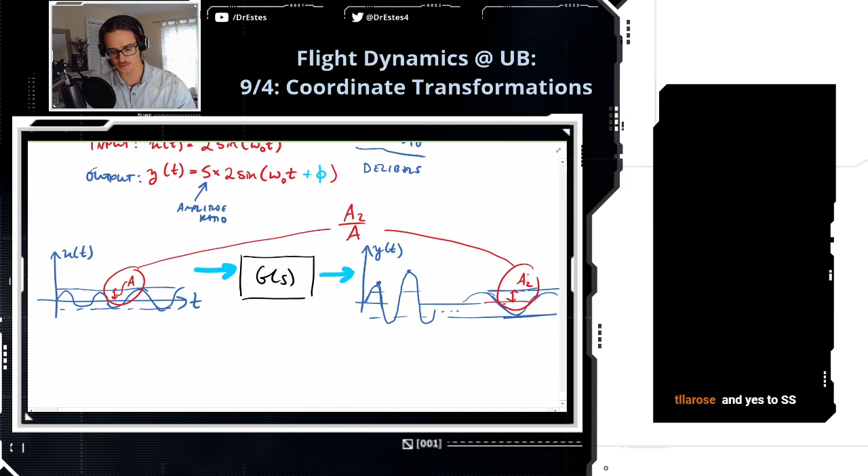So the amplitude ratio, the ratio of input to output, looks at this steady state region. Let's call this A2, the amplitude of the output at steady state. The amplitude ratio is comparing these values, A2 over A. So at steady state, these amplitudes don't change anymore. When you look at a Bode plot and you look at the amplitude ratio at a given frequency, I'm talking about a steady state amplitude ratio.

So then what if A is not a constant and the function has different amplitude zones as a high order polynomial? Will it then not resolve to steady state? Well, that's what I'm saying, there's different amplitude zones.

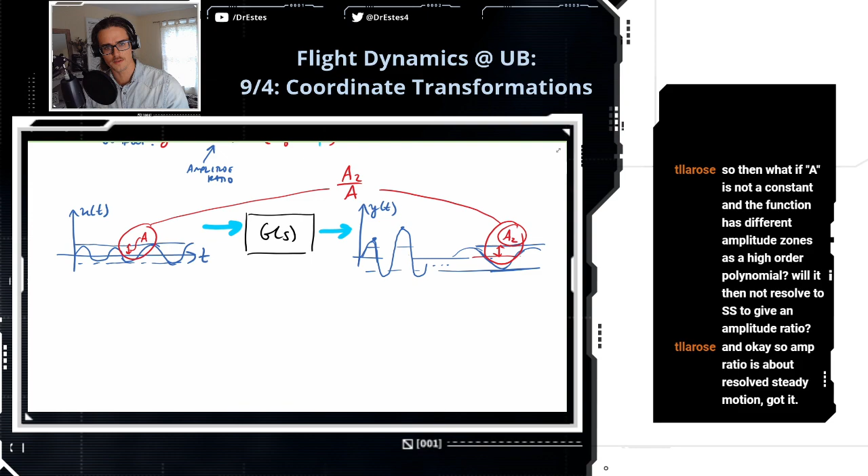Even if your input has multiple frequency components, you can break it down, because that's part of the point of a Bode plot. You might have a complicated input that's a superposition of many different sinusoids, but you can still break that down into its individual pieces and say this component of my input is contributing this amplitude ratio at steady state. So the amplitude ratio is about resolved, steady motion. Everything's at steady state. It does not apply to transient dynamics.

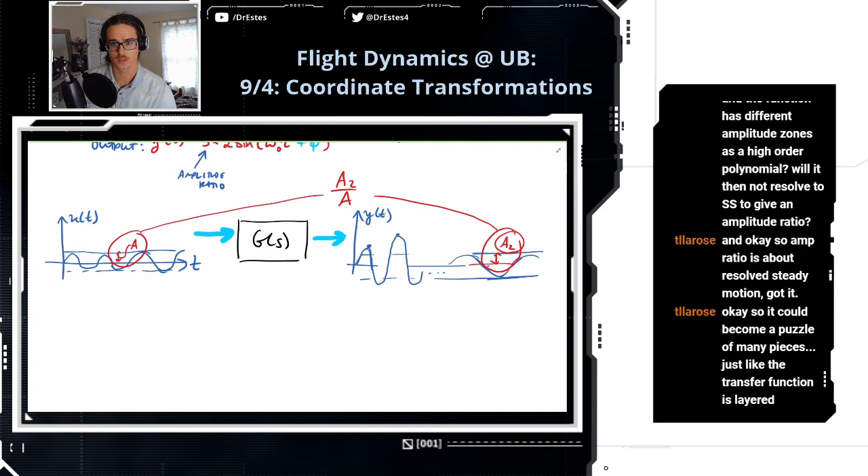Okay, so it could become a puzzle of many pieces, just like the transfer function is layered. It has layers, like onions, like ogres, they have layers. And with that, see you on Discord. With that, I'll leave you.